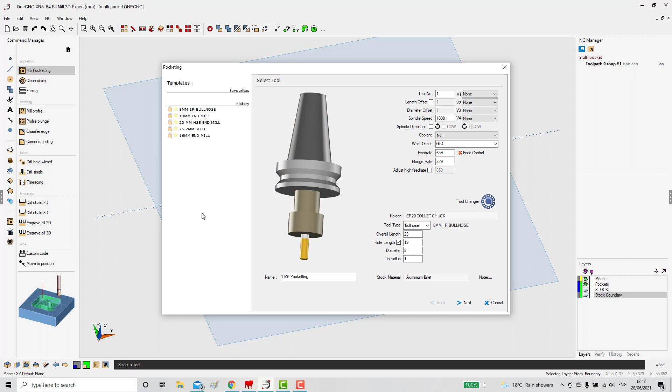So we'll go into our stock toolpaths. We'll use high-speed pocketing. I'm quite happy with the tool selection and the speeds and feeds. Again, quite happy with the clearance form. We'll use high-speed closed. As you can see, there are a few variations in this form. I will explain those in a later part of the video.

We're going to use ramp helix. One of the options available now is you can change the ramp helix diameter from minimum to maximum, obviously allowing you to use larger tools in smaller pockets. Quite happy with the step over distance, and finish.

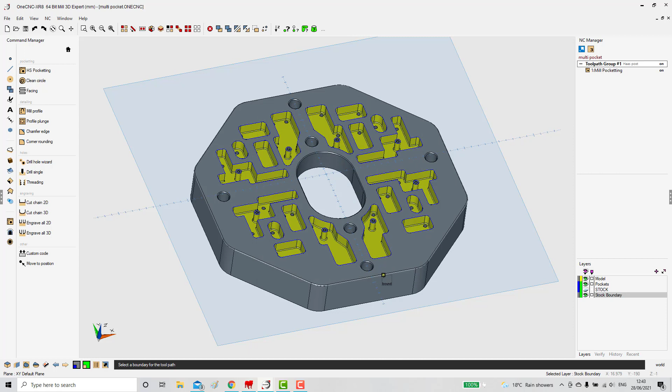Once the toolpath is calculated, we can simulate. So we're going to simulate rest. We just simulate into a stock boundary, select the boundary, and right hand mouse click. As you can see now, there are a few different options available, whereas you can now increase the simulation speed to times 100.

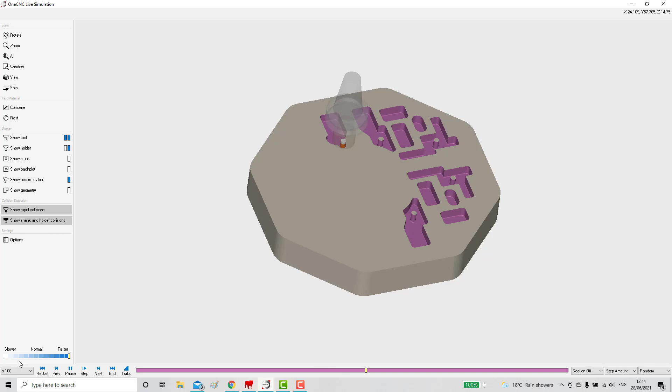And there we have our multi-pocket, a new very powerful tool available in XR8.

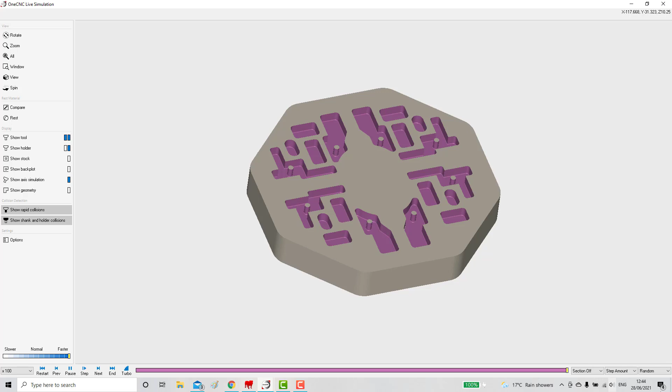What we're going to look at in this section of the video is new options available in pocket machining. So I have a pocket. We'll just go into our stock toolpaths, high-speed pocketing, select the pocket profile. I'm quite happy with the tool selection, the speeds and the feeds, the clearance form and depths. Just to point out, center optimized closed and machine from stock is only available in the Expert.

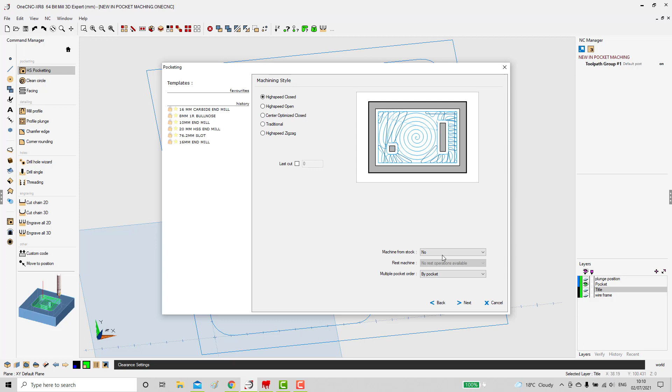We're going to ramp. I'm going to use automatic entry. I'm quite happy ramping in at maximum. Quite happy with the step overs, and finish. And then we have our standard pocketing.

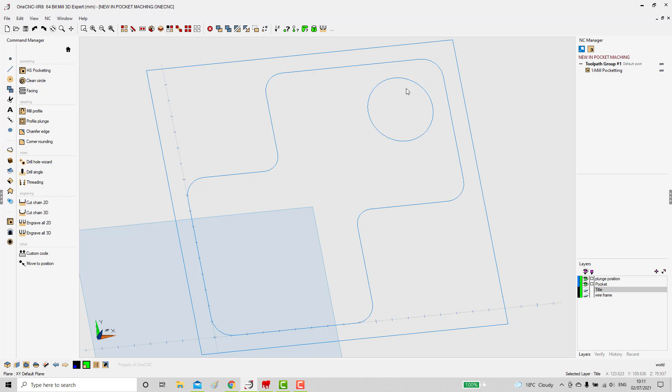If you have a specific area you want to plunge into, we'll just open up a hole. Maybe you've pre-drilled a pocket, or maybe you've got a hole in a casting that you want to plunge into. So we'll now select an entry position. So we'll just go into edit, push through the form until we come to our entry path settings. As we've got a pre-drilled hole, I'm going to swap over to plunge.

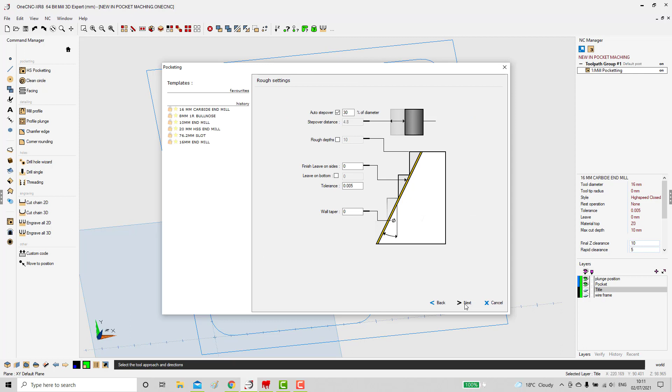We're now going to use select entry position, and we'll just accept the form all the way through. The software is now prompting you to select an entry point, so you simply left click on the entry point. If I just zoom in so we can see what's going on, you can see the tool is now plunging into the center of the selected hole.

This section of the video is going to cover feed control. If I just verify these radiuses, you can see we've got a radius of 8 mm. And for this example, we're going to be using a 16 mm tool. So when we go into our high speed pocketing option, as you can see, I've got a size for size tool going into the corner, and in this example 500 millimeters a minute.

As it reaches the corner, it will stop to change direction, which could induce vibration. This is where feed control comes in. So when I activate feed control and turn it on, the first option is how close you want to start looking into the corner, and that can be set as either a percentage of the tool, or you can manually type in what distance you want to look into the corner. I'm just going to go with the default setting of 25%, but it can be changed to suit.

And what size arcs do you want to slow down on? Well, you don't want to slow down on the big arcs, that's obviously a waste. So we only want to select the smaller ones. And you can do that again either by percentage of the tool or manually typing in what arcs. So I'm just going to go with 25% again. As for feed rate slowdown, set to 50%.

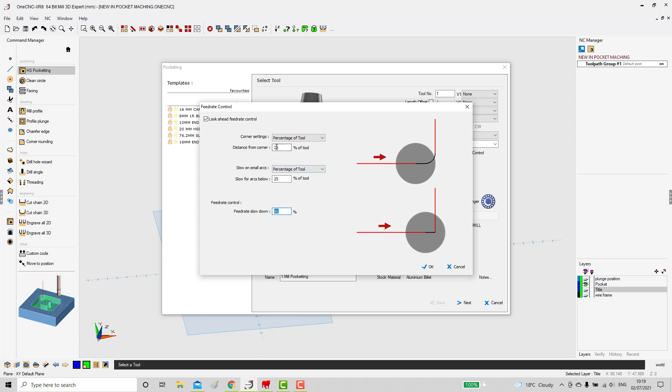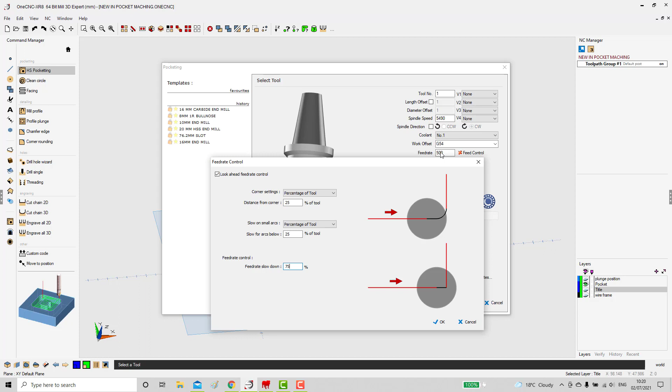Once it gets to within 25% of the tool radius, it's going to slow down from 500 millimeters a minute, which is set, down to 250 millimeters a minute. If that still isn't slow enough, you can up the percentage to 75% or whatever you need, and at 75% it's obviously going to slow down to 125 millimeters a minute. It just makes the rest of the pocket machining more efficient, only slowing down where it needs to.

So you get a little tick box to show you that feed control is being used. Again, a very powerful tool now available in XR8.

In the next section of this video, we're going to look at last cut. So I'll just drop into edit. We'll push through the form until we come to the settings. And last cut, if your tool is capable of roughing and finishing the right size, we're going to put a cut depth in of say 2, and this section allows us to change the roughing strategy from high speed closed to a different finishing strategy, where you can either use traditional or high speed zigzag. Center optimized closed is only available in Expert.

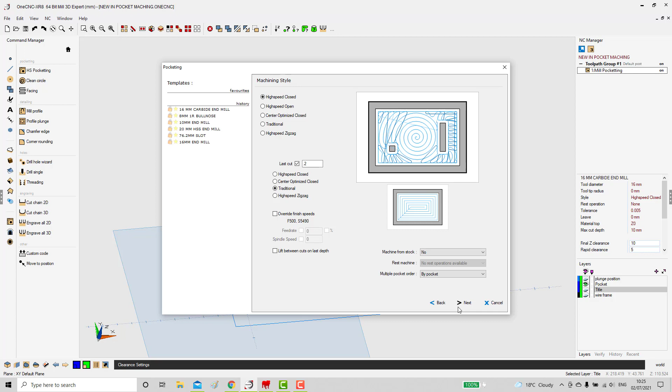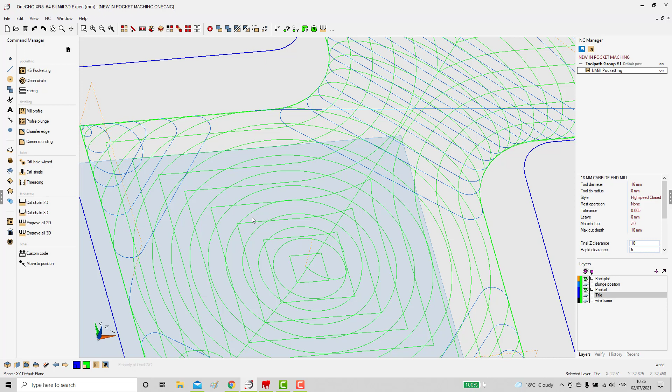So we're going to swap this over to a traditional toolpath for finishing, and we're just going to accept the form all the way through to the end. I'm just going to bring backplot up so I can pin the toolpath on. And when we zoom in, you can see the high-speed toolpath radially spiraling out, and then below there you can see the traditional toolpath. So again, another very powerful tool available in XR8.

In this section, we're going to look at arc optimization, which is a way of OneCNC reducing NC code. So we already have our toolpath. We'll just push through this toolpath without using arc optimization, and we'll post the job out. Okay, we'll just drop that onto my desktop and save. As you can see, the numerical increments on this one are 1, so we have 5,196 lines of information. So what we'll do now is activate arc optimization.

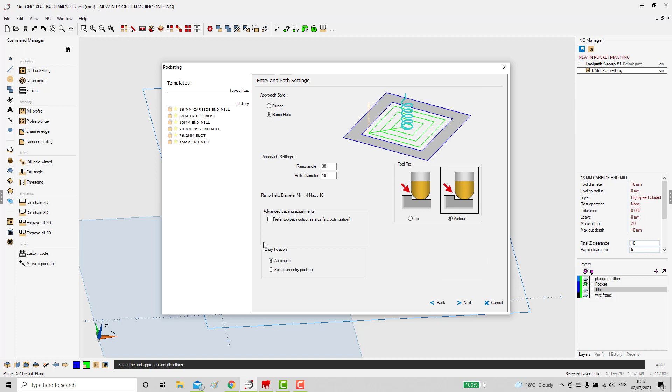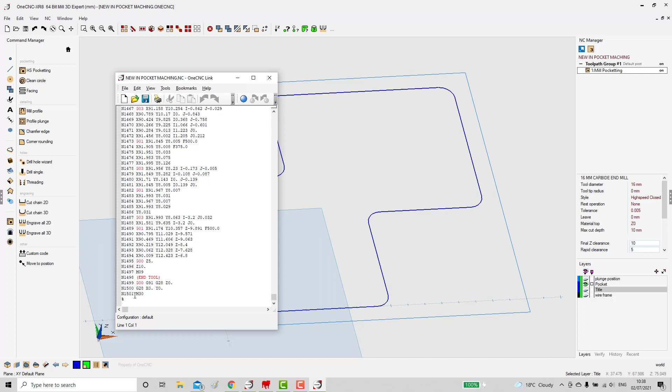So we'll go back into edit, we'll select arc optimization and finish the toolpath. We'll now post this one out and save. And as we scroll down this line of code, you can see there's now only 1,500 lines of information. So a great saver for the older machines that might not have the memory. OneCNC smooths any lines out with G02s or G03s. Another new feature in XR8.

If you are using ball end mills for either pocket machining or profile machining, and you are not going down the full depth of the ball, there are now 2 settings available inside XR8. So we'll just go into edit. As you can see, I've got a 25mm diameter ball end mill, and I'm only going 5mm deep. We'll go with a traditional toolpath. We'll just ramp helix, and in this one, just because I'm using a ball nose, I have reduced the helix down to its minimum. We're using automatic entry for this one, and you can see the first setting I'm using is allow the tip onto the boundary edge. So I now accept the form all the way through.

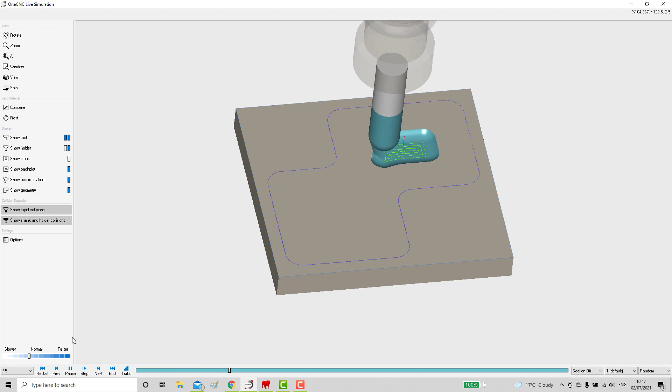We'll just right hand mouse click, simulate. As you can see, if I just view it from the front view and slow it down a little bit, the tool is not going full depth, as I said at the beginning. So we'll just let the toolpath continue. And as you can see, the tangential edge of the ball has been able to reach the pocket boundary.

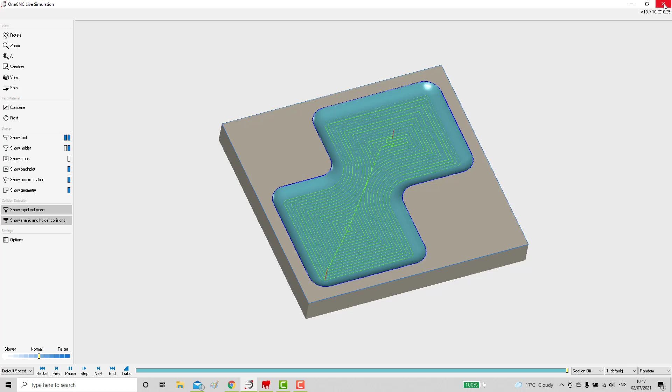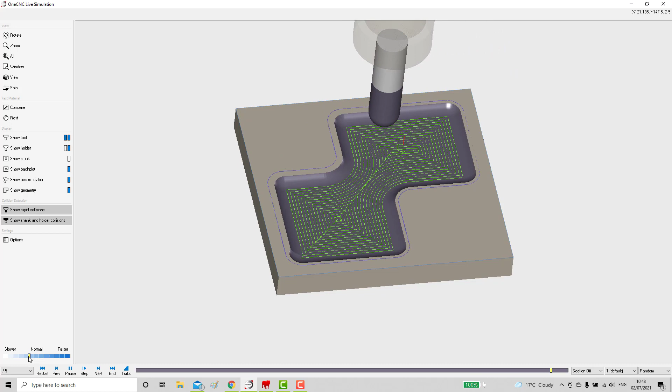The other setting, as I say, we'll just go into edit, and we'll now change it over to vertical. This will allow the side of the tool to reach the boundary and not the tip radius. We'll just accept that all the way through again. Simulate and right click. And as you can see, the tangential side of the insert stays away from the boundary, and it's the diameter of the tool that is allowed onto the edge. Another powerful tool available in XR8.

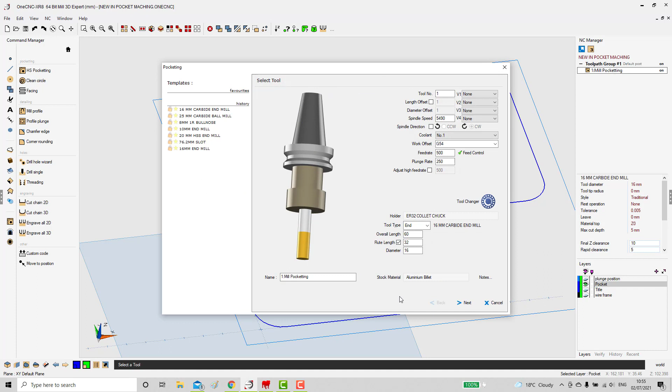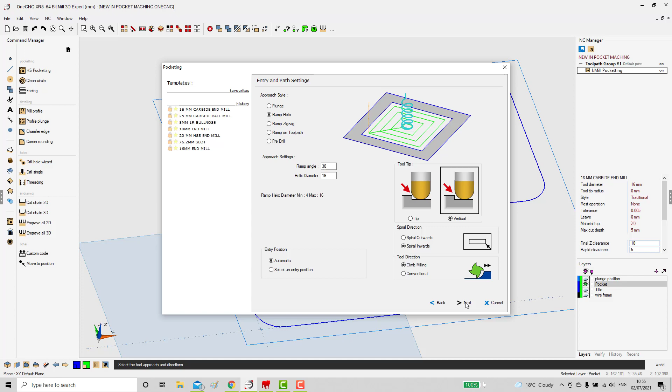In the final part of this section on pocketing, we're going to see the new options available inside traditional pocketing. So we're just going to go into edit. Again, I'm quite happy with the tool selection. As you can see, we're using traditional. You still have last cut available in traditional, where you can swap over to zigzag if required. What we're looking at is lifts between cuts on last depth. We'll run this toolpath without using that option. So I'll just accept the form all the way through to the end. And what I'm going to do is just backplot this toolpath.

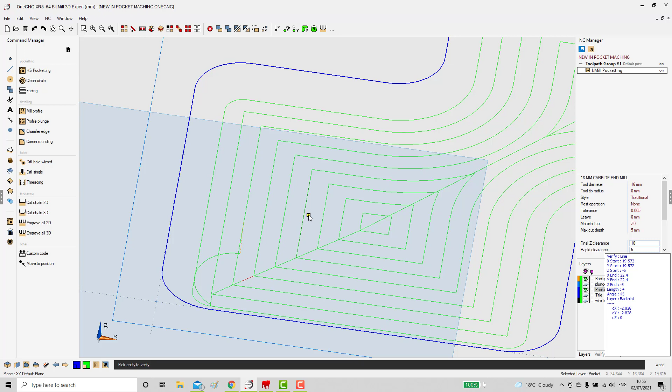The way that traditional moves out through its next concentric path is a linear line, which can obviously leave witnesses on the base of the pocket, which is sometimes not desirable. As you can see, if I go into my verification tool, the path between each concentric move stays on the base of the pocket at -5. So what we'll now do is have a look and see what difference lift does. So we'll just remove the backplot.

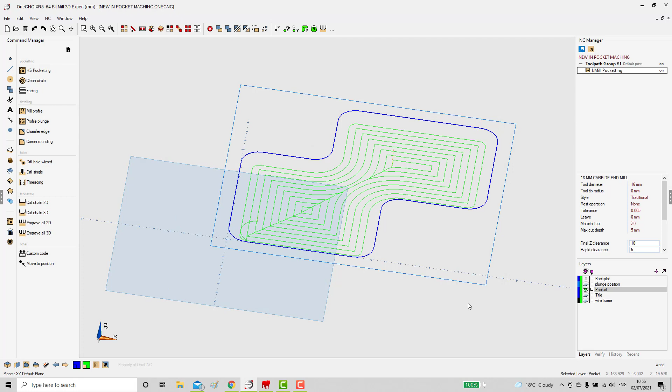We'll go back into our traditional toolpath, accept lift between cuts, and accept that form all the way to the end. Again, I'll bring backplot on so I can zoom in. And as you can see, the lift, the linear move, and then the taper move down to the next cut. So it eliminates all witnesses from the movement of the concentric paths. Again, another great feature in XR8.